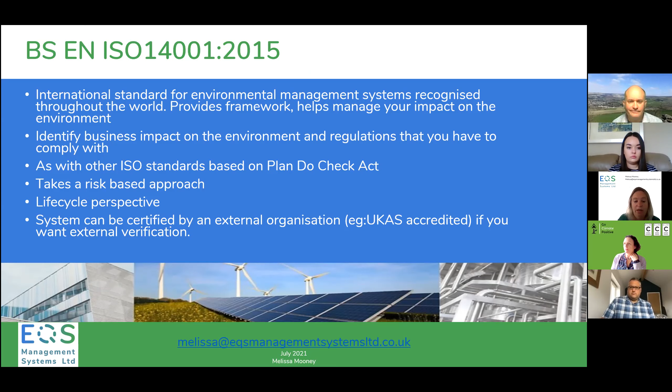So your system can be certified by an external organisation if you want, or you can simply use it as a tool to develop an environmental management system for your business.

So plan, do, check, act. I love this - it's a very simple process, but I really think it's helpful. Also known as the Deming or Shewart cycle. Many ISO systems and standards are based on this, including ISO 9001. And the aim is to continually improve.

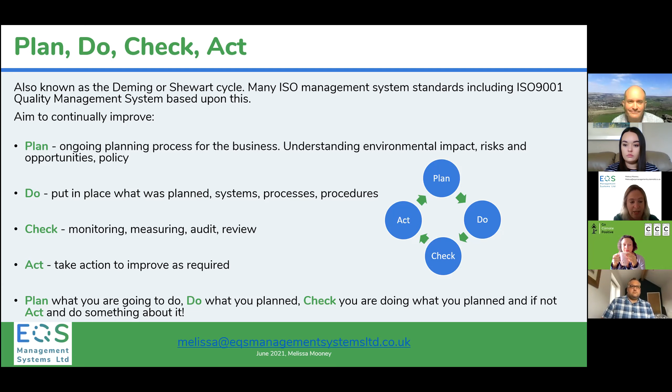So it's about planning your business, planning what you're doing, having an ongoing planning process, understanding your impact, your risks and opportunities, and having a policy. Do - putting in place what was planned, so systems and processes and procedures. Check - monitoring, measuring, audit and review to check you're doing what you should be doing. And act - taking action to improve as required. So plan what you're doing, do what you planned, check you're doing what you planned, and if not, act and do something about it.

Risk-based approach: risk is the potential to cause harm, and understanding the environment in which your business operates and the risks and opportunities, for example through your business plan and strategy, is really important. It asks you to be preventive rather than reactive, which is always better - it's better to prevent things happening than react after the event.

And it requires you to have processes and measures in place so that you can anticipate, address, and mitigate risks to the business. Risks, in terms of ISO 14001 or an environmental management system, are obviously environmental and legal, but wider risks such as social, political, technological, and economic risks should also be considered. So you could carry out a PESTLE, for example.

A life cycle perspective: the stages of a product or service from raw material purchase or generation from natural resources right through to final disposal, including design, production, delivery, use, end-of-life treatment and disposal. ISO 14001 doesn't require a full life cycle assessment, but consideration of life cycle stages that can be controlled or influenced is important.

This is important because significant impacts may be outside of your core activities and site activities, for example use by a consumer. I used to work for a cider maker, and how the customer disposed of or recycled those bottles was important. Also important are your suppliers' activities, for example apple suppliers using pesticides or that kind of thing. So there's an opportunity to green the supply chain and really influence your customers.

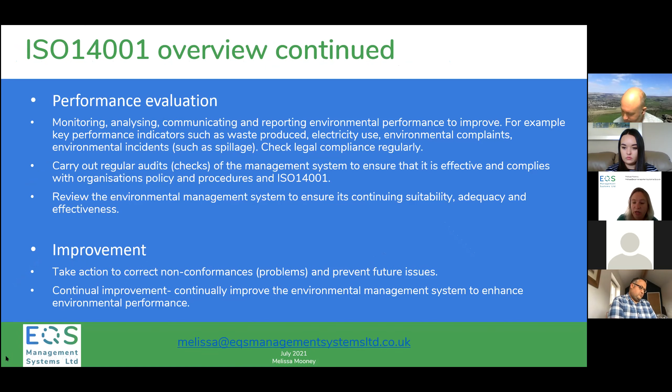So how does ISO 14001 help you? Well, it provides a framework to manage and control your processes, maintain standards. It helps you improve your understanding of your impact on the environment and those impacts which are significant so that you can prioritize action. There's an awful lot of environmental impacts and it's hard to see the wood from the trees at times. So having a list of those which are significant helps you to determine where you start first.

Hey everyone, I'll just get my screen up and running, hopefully. Can you see my screen actually? It doesn't seem to have shown up on here. You can see that, you can see it properly. Okay, great. And then hopefully that's gone into present to you. Great, perfect, everything's working. So thank you very much.

It was really interesting, Melissa. Thanks very much. And certainly a lot of what we do seems to be a bit of an overlap, actually. So we do have the 14001 accreditation, so it's kind of great to get a little bit of an overview of that, actually, because I don't tend to be involved in that side of things so much.

So obviously I'm here today. I'm Paul Neep, Associate Architect at Architype. As Simon introduced before, we're an architectural practice. So I'm here today to talk you through our approach to sustainable buildings, and how we go about making sure that we deliver results as part of that process.

So, first off, a little bit about us, but I won't go into too much detail. We are a practice based across the UK. We've got 3 locations in Edinburgh, Hereford, and London. We've currently got about 86 employees, increased in size quite rapidly over the last year, as everyone starts to get a bit more of the importance of the sustainability agenda. So it's quite an exciting time for us.

We've got about 20, or probably more, certified Passivhaus designers now. I'm not sure if anybody knows what Passivhaus is, but it's one of our key approaches for driving down energy use in our buildings, and I'll go into a bit more detail as we move through this. It's also worth mentioning that we are currently 30% employee owned, and working towards being majority employee owned over the coming years, and fully employee owned beyond that, so that our employees really guide the business forward.

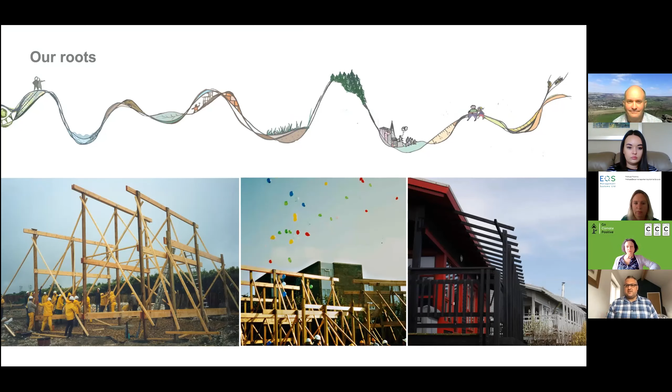In terms of our early roots, the practice started about 35 years ago, still doing sustainable design, but back when it was a very hippie thing to do, so it's become much more mainstream since. We initially started off supporting self-builds, housing projects and self-build cooperatives. This is an important part of our background and the approach we take now, because it meant we had to develop details which were incredibly simple to build and incredibly effective. This carries through into the way we do things now, enabling us to support builders and clients in understanding the process and making it easy to move forward.

In terms of what I'm going to talk about today, carbon in the construction industry: the built environment contributes about 40% of the UK's carbon footprint, so absolutely significant. This is roughly split into two areas within the construction industry: embodied carbon, which covers the emissions from manufacturing, transportation and construction of buildings; and operational carbon, which is directly linked to the operational energy needed and the carbon emissions generated as a result.

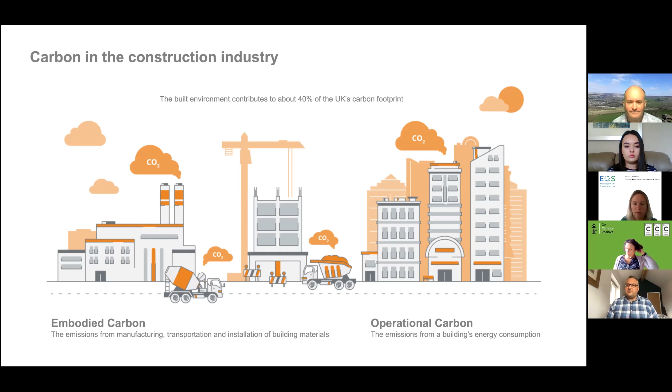In terms of how that roughly balances out, it varies slightly by building typology, but typically about two-thirds of the carbon footprint of a building over its life cycle is operational carbon - the electricity, heating, hot water, and everything that feeds into that process. So that's primarily what I'm going to focus on today, though I'll touch a little on embodied carbon, which is certainly a separate topic. The way legislation in the UK is moving forward is very much focused on operational carbon at the moment.

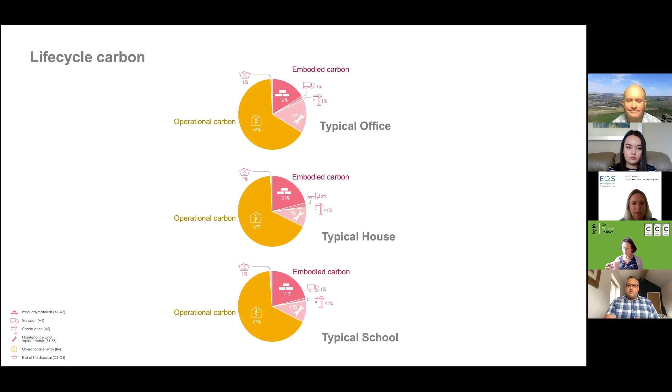So operational carbon. As most of you will probably know, the idea of net zero carbon for projects is about creating a balance between the energy used or required for a building, and balancing that against the renewable energy that needs to be generated, either through on-site renewables like solar panels or contributions to off-site renewables.

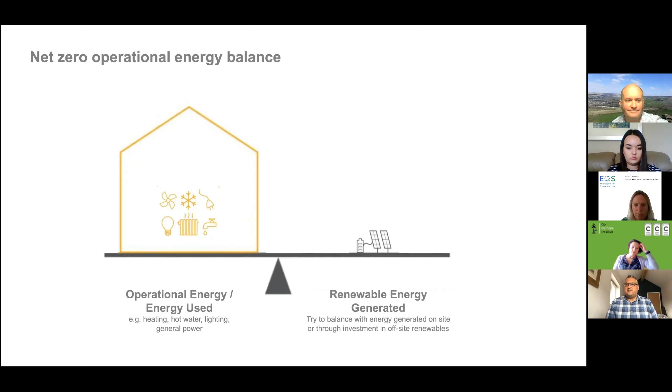So this is a very simplified diagram. Have a look at that balance. Our approach is typically on the basis that the less energy you use, the more easily you are able to balance that out. So driving down the energy use of our buildings to an absolute minimum means we then have to balance that out with relatively minimal renewable energy, which is pretty simple.

In terms of, I mentioned before about Passivhaus and our approach to designing buildings. So just a quick intro into Passivhaus for those who don't know anything about it. It was an energy standard developed in Germany about 30 years or so ago, and the intention was that it was based on a rigorous assessment of how buildings actually performed, so it could provide an evidence-based route to guaranteeing energy performance.

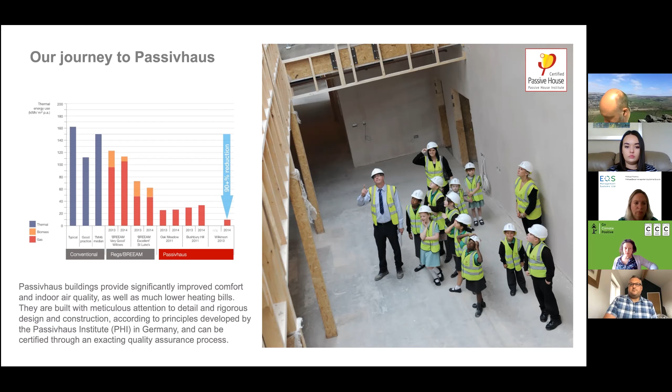So just a quick overview, not a huge amount of detail, but I've split it up into 2 slides. Firstly, the approach to the sites.

So buildings ideally optimize the orientation. Facing the buildings and the primary windows south means you'll get optimum solar gain in winter, and you'll also be able to shade the windows better in summer because the sun's higher and you can control them more effectively.

So orientation is key. North-facing windows are useful for daylight, but they tend to lose more heat than they gain. East and west-facing windows do have solar gain in winter, but the problem is in summer when the sun's low in the morning and evening, it can penetrate deeper, so you get greater overheating risks as well.

So this is all just part of the design toolbox that we use. It's not necessarily a constraint or an issue to us, it's just part of the considerations that once you understand, makes a big difference.

The next element is about making sure we limit the amount of heat that gets lost from a building. This is basically a simple calculation between the volume of a building and the amount of external wall, floor, roof, effectively the building fabric where you've got the opportunity to lose heat.

So the equation roughly works that the better the form factor, i.e. the more compact, the larger the building is and the less external envelope you've got, the less heat you lose. This enables us to design more effective buildings, and it means we focus our attentions early on to design sites and approaches to optimize building form. Larger scale, more compact buildings will perform better, but we can make most things work, it certainly makes things a little bit easier on the journey.

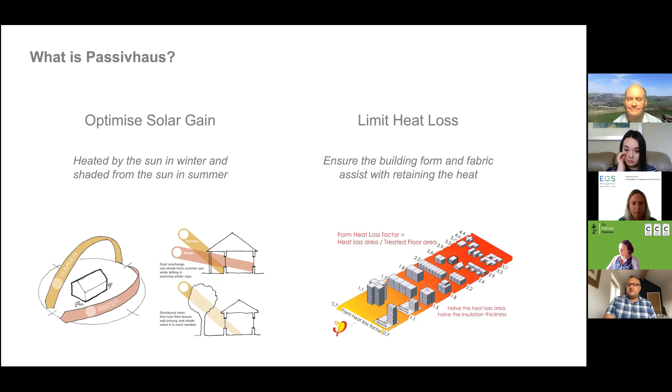The next element is about the building itself, on the more technical design detail level of things. A Passivhaus will need to have high levels of insulation that wrap continuously around the building. We often refer to this as a duvet layer.

So continually wrapping around the floors, walls and roof, and in combination with making sure that we don't have elements of structure penetrating through that insulation if at all possible. This is often called thermal bridging. The idea is that cold can transfer through elements like steel or masonry through to the inside, and when introduced into a highly insulated box, that can create different temperature differentials very close together, which can lead to things like condensation, growth and mold risk.

So actually making sure that's all taken out of the equation is really important, and a key thing about Passivhaus is also triple glazed windows. Basically, in a Passivhaus, the triple glazed windows are your radiators. You touch them in the winter, they're hot, they're providing the heat for the home, and they're also triple glazed, making sure you don't lose heat as well. So it's a really critical part.

This is all topped off by having a great level of air tightness and then mechanical ventilation heat recovery. The air tightness for a Passivhaus home is down to a level equivalent to about a ballpoint pen size hole in every square metre of external fabric. Compared to building regs, that's about a hole the size of a 50p piece in every single square metre of external fabric. So we need to make sure we get rid of all the drafts, we eliminate the potential for air to seep through and cause problems.

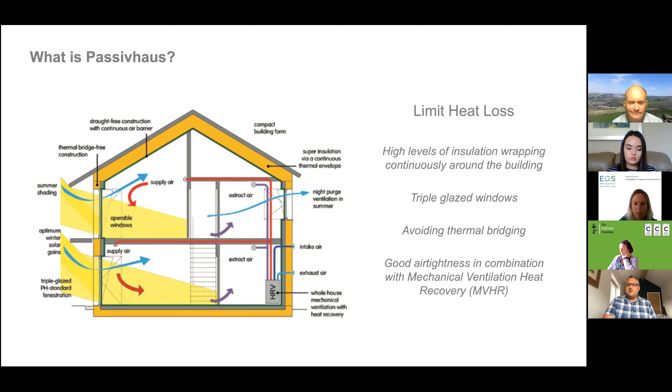We complement that by introducing mechanical ventilation heat recovery. The MVHR draws the warm, stale air out of kitchens and bathrooms, for example, and then transfers about 90% of the heat from that air into the fresh, oxygen-filled air entering the building. Whereas most approaches to natural ventilation effectively just replace all the air you've tried really hard to keep warm with cold, fresh air, the MVHR system retains effectively 90% of that heat. So it really makes a massive difference in keeping temperatures consistent.

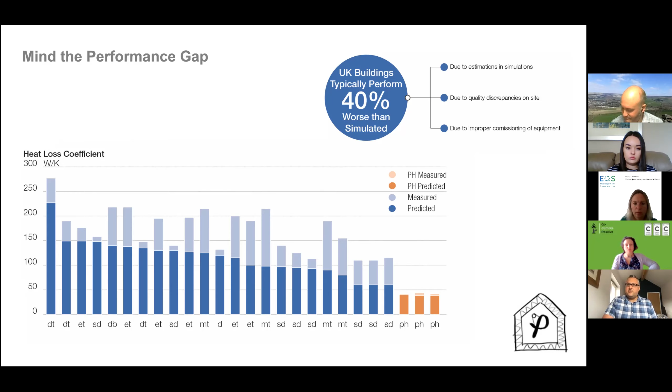Other benefits of Passivhaus: obviously incredibly low energy costs, addressing fuel poverty for housing, reducing rent arrears, providing better quality of life, improving profit when it comes to business as well, creating much better internal environments, removing the potential for condensation and mold growth, consistent internal temperatures all year round, and managed overheating risks.

And as I mentioned, the MVHR provides a consistent, fresh, oxygen-filled air that can also be filtered for pollution and pollen as well. And triple glazing provides an incredible acoustic benefit as well, especially in a built-up area or a noisy environment. Again, without having to open windows all the time in order to get sufficient ventilation in a lot of cases.

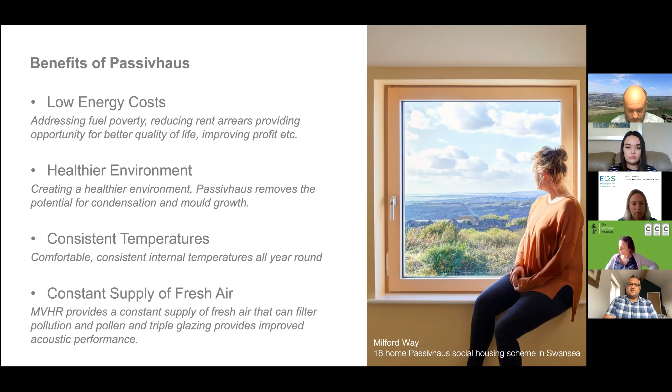Passivhaus is also a rigorous quality assurance process. It makes sure that buildings are designed rigorously, and as they're built, they have to be evidenced in construction in a much more rigorous way than building regulations. So actually, it guarantees that performance as intended.

There are a variety of other benefits raised as well, such as longer tenancies and shorter void periods, with knock-on impacts to reducing administration and legal costs, and making properties more appealing when they become available. And as I mentioned, really meeting the climate agenda and being zero carbon ready.

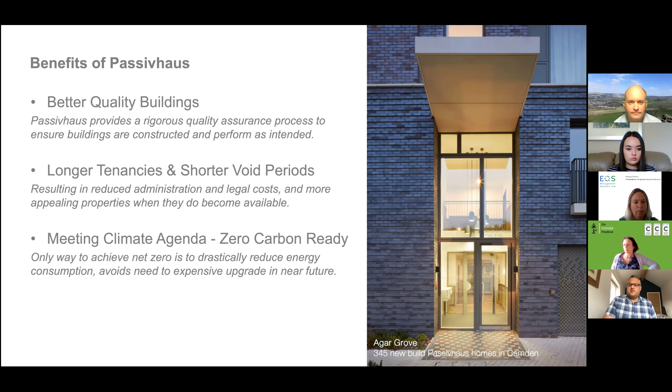I think probably most people are aware of the end game when it comes to the UK roadmap to zero carbon, mentioned again by Melissa before. Starting on the right hand side, 2050 target for the UK to be carbon zero. I've tried to set out in a diagram how the built environment or building industry is looking at, or how legislation is working in terms of moving things forward.

Working back from 2050, by 2030 it's likely that all new homes would need to be zero carbon, to allow the process beyond that point to upgrade all existing buildings. I should clarify I reference homes a lot here, but that's only because this future home standard has been developed at the moment, and the future building standard is running slightly behind, but is expected to have a very similar level of sustainability requirements. So working back, 2025 is where the future home standard is likely to come in, and the future building standard at the same time.

This is also intended to coincide with the dates where no new gas infrastructure will be allowed on new developments. So it's intended to increase insulation and building performance, and also swap over to low carbon heating systems like heat pumps. And in parallel along the bottom is where we're going with most of our Passivhaus projects in comparison.

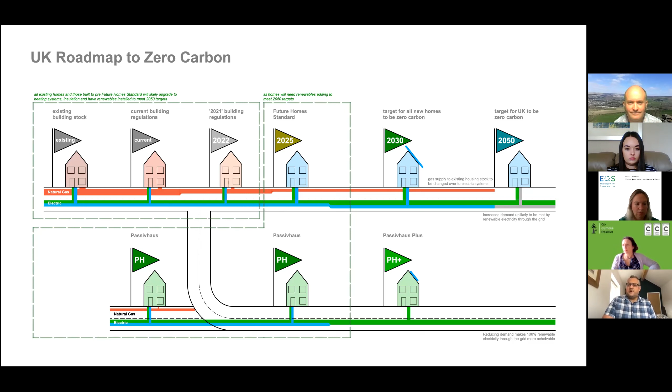For example, in the past we've been able to use natural gas in those, but we don't tend to now. So we're very much at that 2025 level in most of our projects with heat pumps, and in quite a few actually beyond that, looking at the Passivhaus plus level with renewables as well, which is about the Passivhaus equivalent to zero carbon.

So just as a quick comparison between where things are going to be, this is only 4 years away, and it's likely to be taking us in a direction where insulation levels actually exceed a lot of the insulation levels we deliver currently on Passivhaus projects. So it will almost become the norm in 4 years' time to deliver Passivhaus levels of insulation. And low carbon heat pump type solutions will be a requirement. It's not a requirement for Passivhaus, but we will be guided by that.

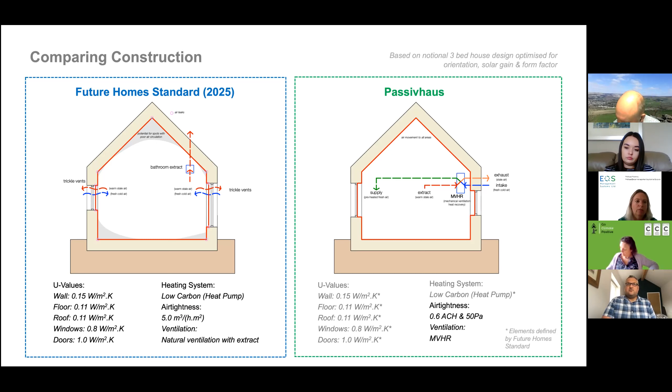So the main difference between the two is the air tightness, as I mentioned before, and the difference in the ventilation systems. Natural ventilation is still allowed for future home standard, and with Passivhaus we need the MVHR, which makes a massive difference to how the buildings actually perform.

Let me strip this back a bit so I can explain quickly - we worked out a quick notional 3-bed house study. This is bearing in mind that this is a house which is absolutely optimized to achieve Passivhaus, so the right form factor, windows facing in the right direction and the right size and everything like that.

Comparing the future home standard and Passivhaus, the energy bills of the future home standard home are still looking at upwards of £1,000 or more a year. A lot of this is because we're swapping over from gas to electric, and gas is about 4 times cheaper than electric. So unless you really reduce the energy usage, energy bills are going to be going up for people. People could be moving into these homes who have lived in relatively new building regs level homes before with gas boilers, and their new super sustainable homes are going to be costing a lot more.

Whereas the impact of the MVHR on the Passivhaus and the air tightness is likely to halve those annual energy bills at least. And also considering net zero carbon - this study worked out that the amount of energy needed for the future home standard home roughly worked out to balancing that out with covering about 100% of the south-facing roof pitch in PVs, whereas the Passivhaus home was about 60% in order to balance out the energy usage.

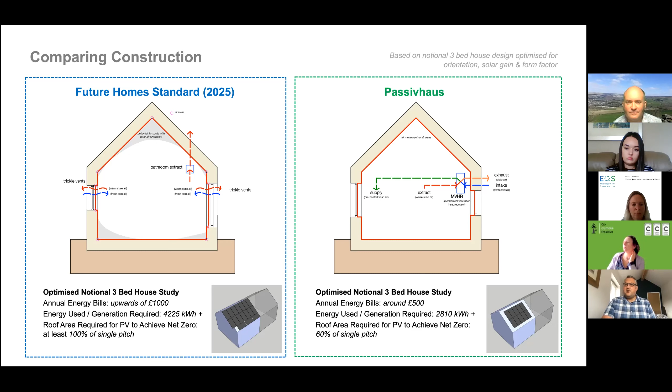Also bear in mind that this future home standard is based on being analysed and built correctly, without the performance gap implications. So actually, I think in 4 years' time, it's going to be much more attractive and much more cost comparable to deliver Passivhaus projects.

This is a quick example study I've put together on the life cycle impacts, based on initial construction costs through to the life cycle of buildings. It's important because people often see an initial uplift for a better quality, more sustainable building as being out of reach. But this varies a lot across sectors, and in some places we're designing Passivhaus projects for cheaper than building regs level projects, especially where they're heavily serviced.

What I've taken here is a notional £10 million construction project. Say there's an 8% uplift to Passivhaus, so you're looking at maybe an 800,000 initial uplift. But then you look at the running costs, and what you're looking at is a saving over the life cycle of upwards of £8 million, with a payback within 10 years. So when you think about it in terms of a business case and viability moving forward, this makes a massive difference.

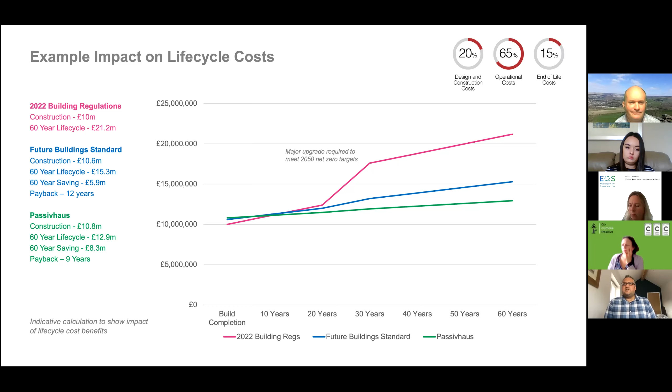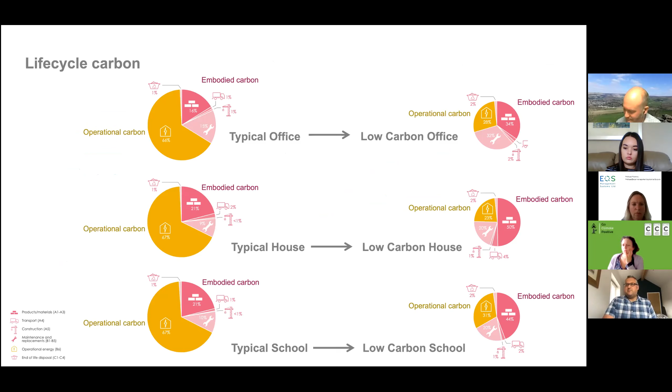I said I wasn't going to go into too much detail on the embodied carbon side, but as you can see, once you reduce the operational carbon down, the embodied carbon plays a much bigger part of this. I'm conscious I'm close to running out of time, or may have done already, so I'll whiz through this.

What we have developed is an embodied carbon assessment tool called Ecolab. This is developed by the practice. It means we can get into the detail of where the embodied carbon is associated within the construction, and then look at replacing and refining that.

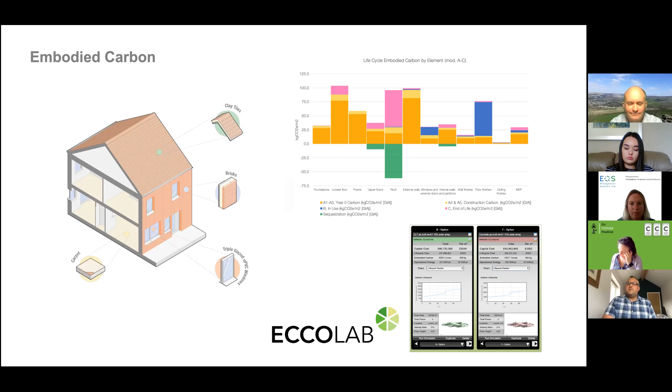Another key part of our approach is to look at refurbishment first, if at all possible. There's a saying in the industry that the most sustainable building is the one that already exists. The problem is, if you demolish an existing building, you're effectively wasting all the carbon locked up in it, and then using more carbon to build something new. A full retrofit can be relatively expensive, but it's likely to be cheaper than a new build, and it's going to have significant carbon savings.

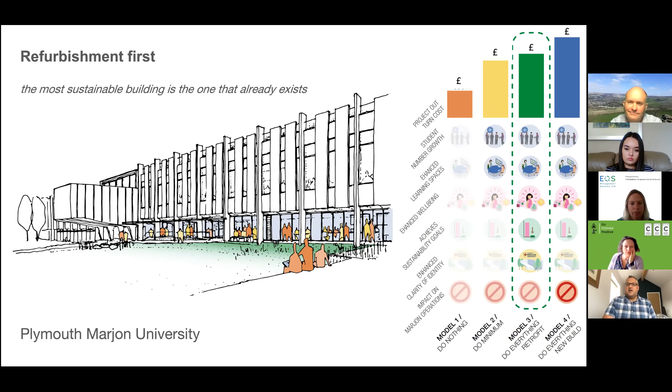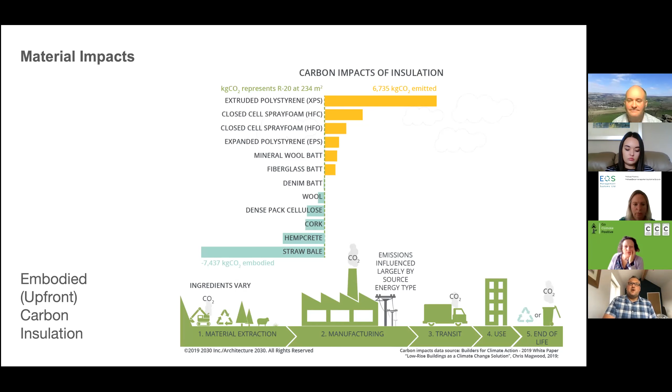We also get into quite a bit of detail on materials and how they can impact things - from the top end, looking at polystyrene type insulation, right the way through to straw bale at the bottom, which actually stores a large amount of carbon. This is probably a discussion for another day since I'm going a little over time, but looking at bio-based and locally sourced materials makes a big difference to this process.

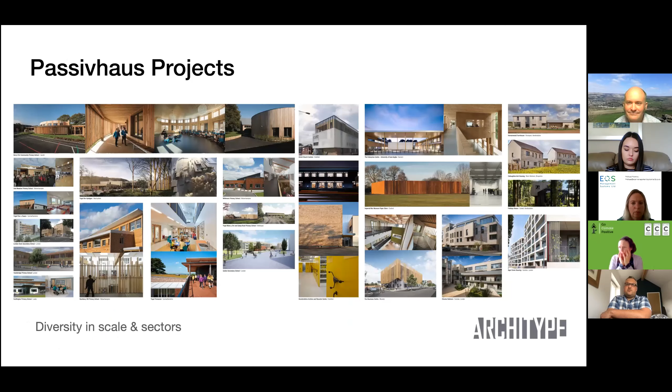Just to finish quickly with a couple of projects - as I mentioned, we're working across a variety of sectors and scales. Just flicking through a couple of headline projects: we've just completed the first zero carbon primary school in the UK, in the London Borough of Sutton, which ended up with an EPC rating of -27.

A couple of years ago we completed a Passivhaus Plus business incubation office, the eco business centre in Bicester, part of the eco village there. This effectively takes it beyond net zero in terms of energy - it generates more energy than it needs to use.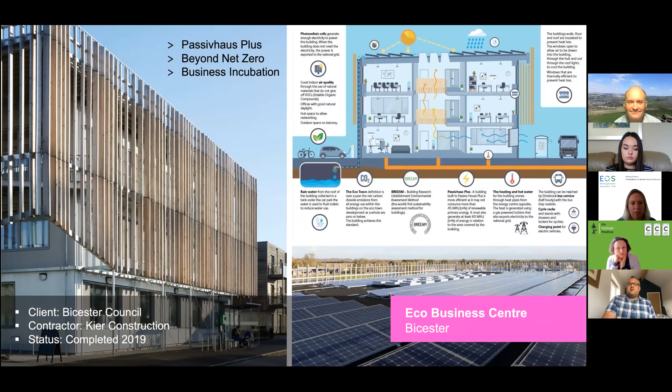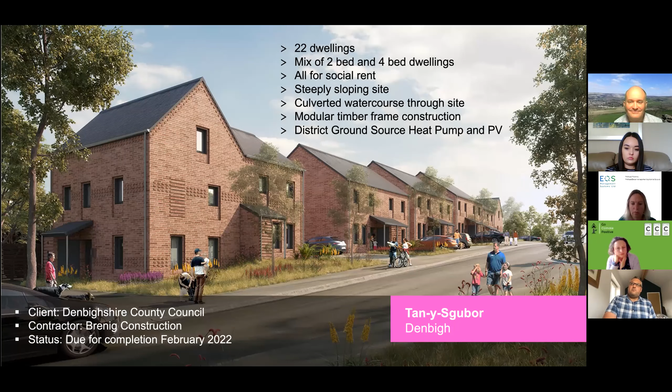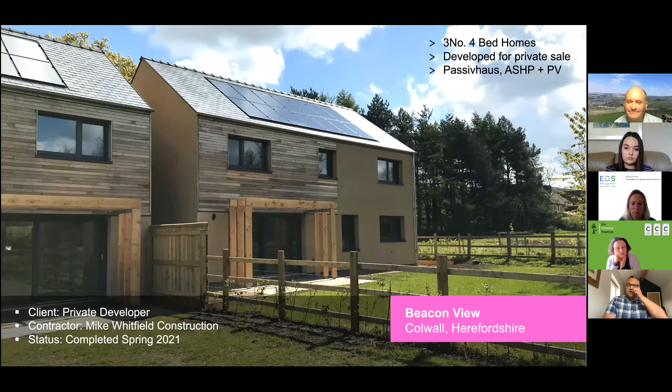We've also got a variety of housing projects at the moment - a social housing pilot project for Wolverhampton City Council, and a similar one for Denbighshire County Council. All of these have no gas infrastructure, looking at air source or district ground source heat pumps and PVs. We've also completed private housing projects and much larger scale apartment projects, including a 345 new-build Passivhaus scheme in the London Borough of Camden.

I think that's probably about it for me. I probably waffled on really fast there trying to wrap things up, but any more questions afterwards, please don't hesitate to get in touch.

Thanks, Paul. Yeah, I mean, we could probably host a whole day on Passivhaus. So we'll get the questions - there's a couple from Melissa. There's one here about, I don't know if you've read them Melissa, but basically, if you identify an environmental impact that you have control over, do you have an obligation to eliminate that and report it?

You don't have to eliminate risks, the point is to identify them, manage and control them, and minimize their effects as far as possible. For example, if you've got big tanks of chemicals, having them bunded, stored and checked properly.

There's also a question about whether 14001 certification is appropriate for all businesses, and the costs associated. Any business might be interested in having their environmental management system certified to show evidence that somebody has assessed their system and found it compliant. Yes, it is suitable. The majority who have 14001 are manufacturers and larger organisations, but I do know consultancies who have it, and it's applicable to any organisation.